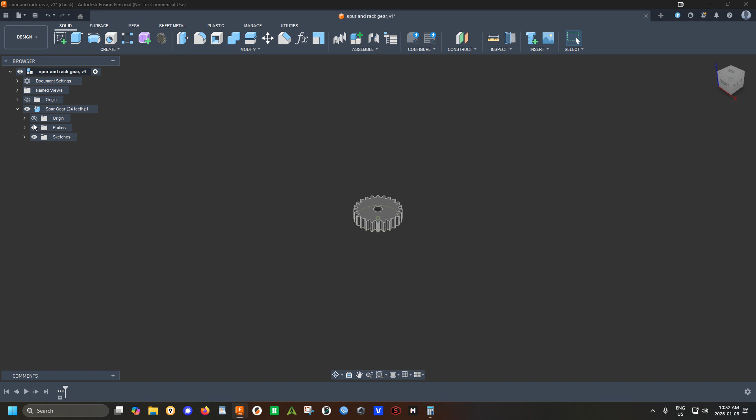Now let's go in here to our gear. Let's go into the sketch. So here's the tooth that it had used. And here's that. Okay, let's go. We don't need that for right now.

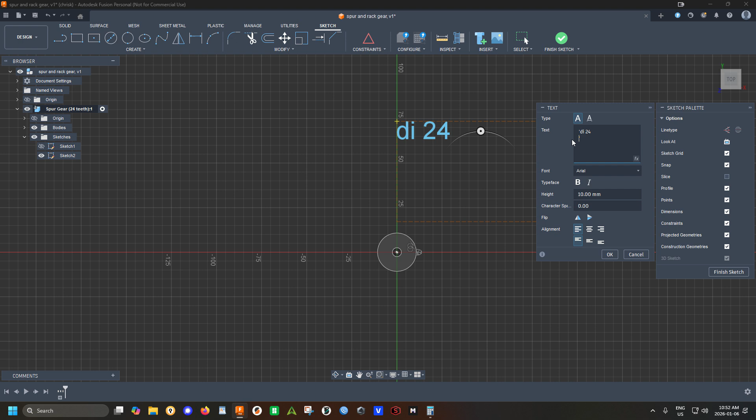Let's say edit. Now just for ease of use, so we have a diameter of 24. We have teeth of 24.

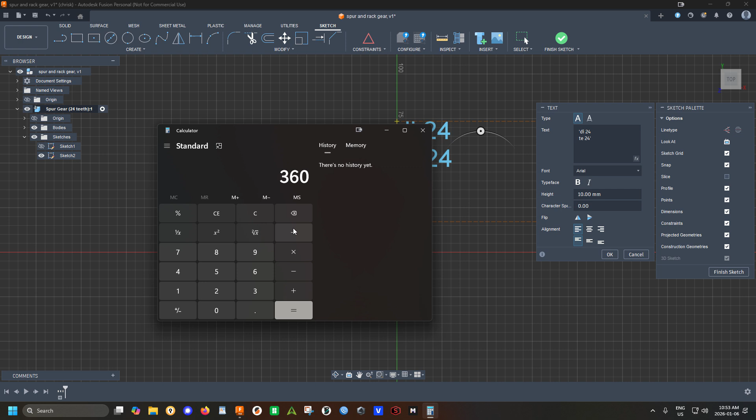And now let's do a full gear is 360 degrees. 360. Now let's divide that by 24. That gives us 15 degrees. Now we need half of 15 degrees. So let's say divided by 2 equals 7.5.

So let's go 15 and 7.5. Okay.

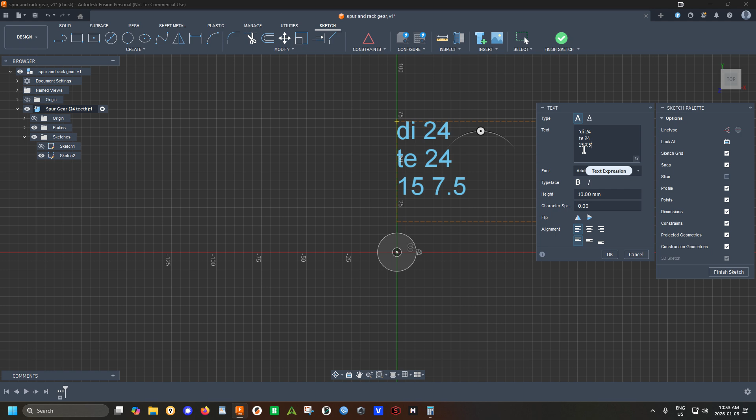Now let's start by we click the center point. Let's click the move thing. Now I'm just going to select all of that. Now I'm going to copy this so I don't mess up what they have there.

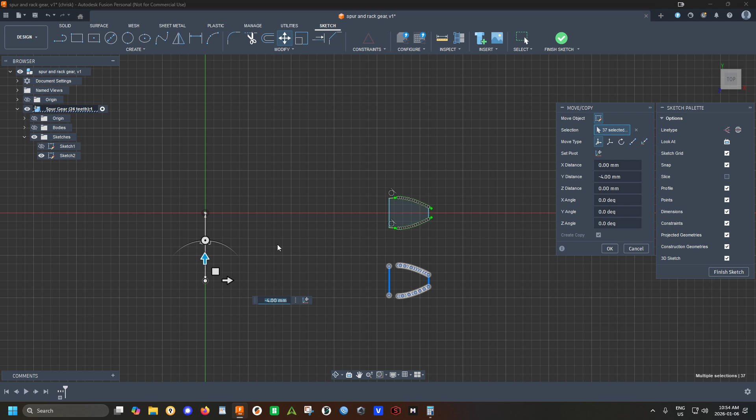Now we're going to go down the diameter. So that is 24. Okay, now let's rotate 90. There we go.

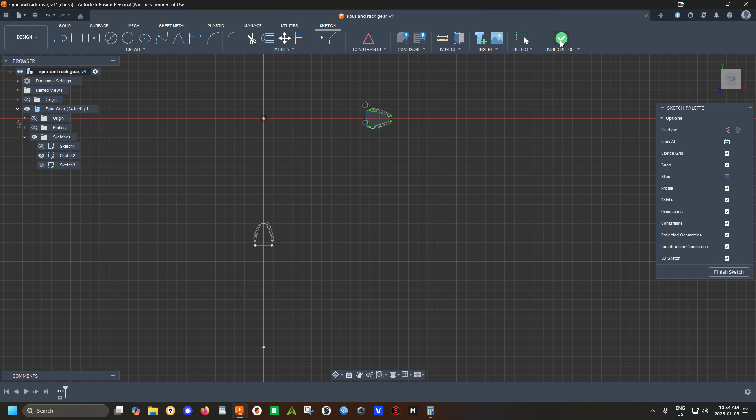Now, this new little tooth should match up with the body. So let's just go in here and now cancel. Need to click our center point, then hit that. Now we can, we don't need to turn the center point.

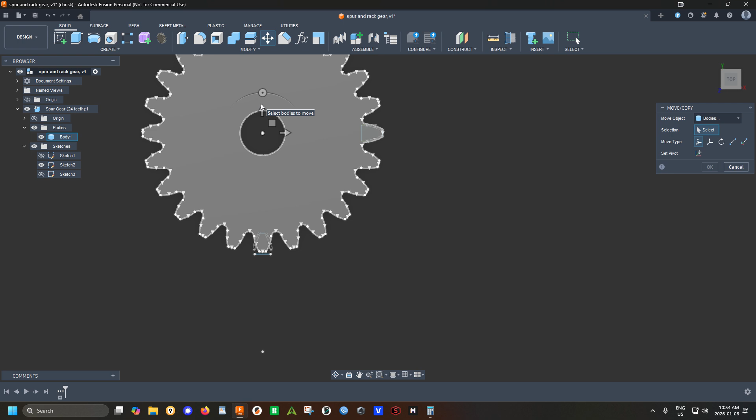Okay, there we go. Now we've selected the gear and the center point. Now let's take this and let's go 7.5. That should then exactly set us in the right spot for our little gear here.

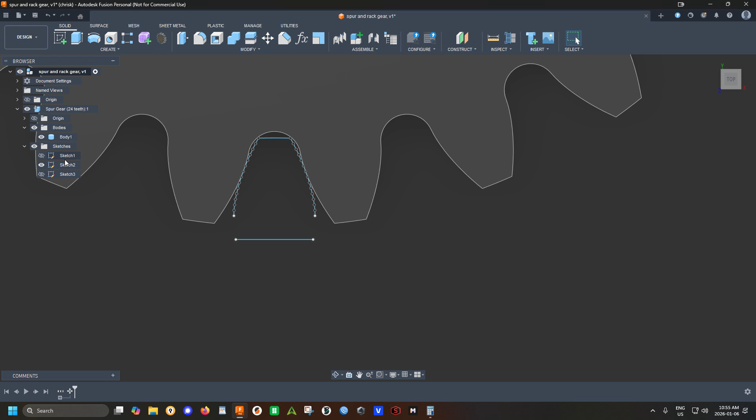Okay, now let's go back into here. Let's use the extend function. Now, if any of these aren't here, they'd be down in here. Sometimes I pin things up along the edges.

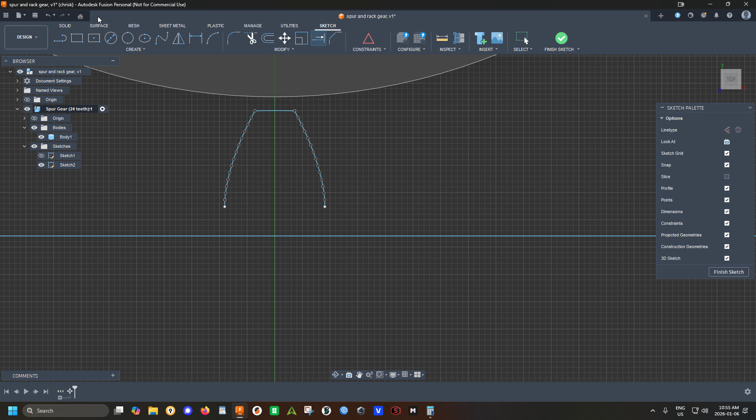Okay, now let's go down with this. Go down like that. Let's go. Cut. Then let's go.

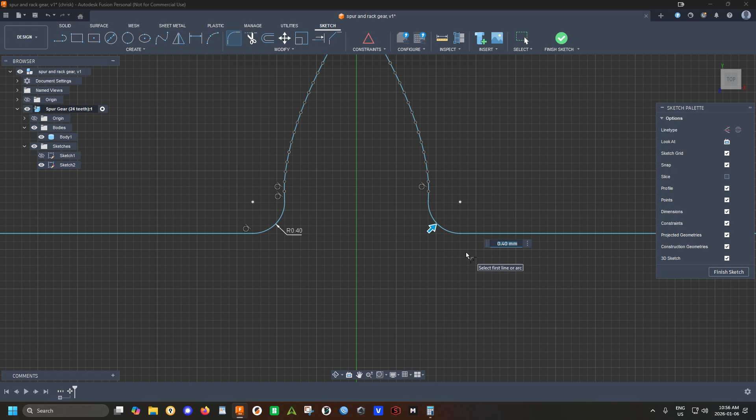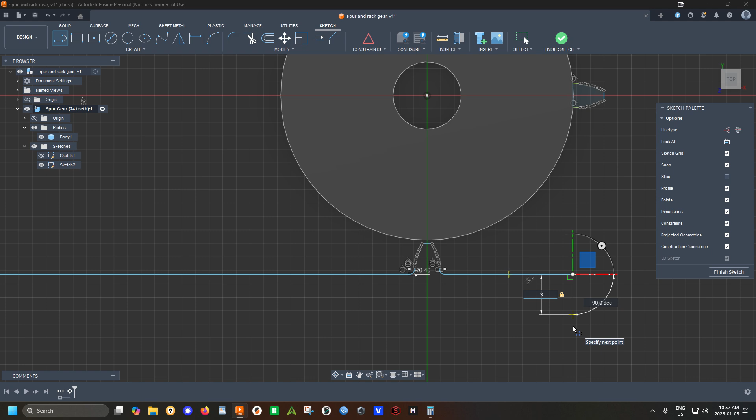40, 40. There we go. Okay. Now we have this. Let's say 3, enter.

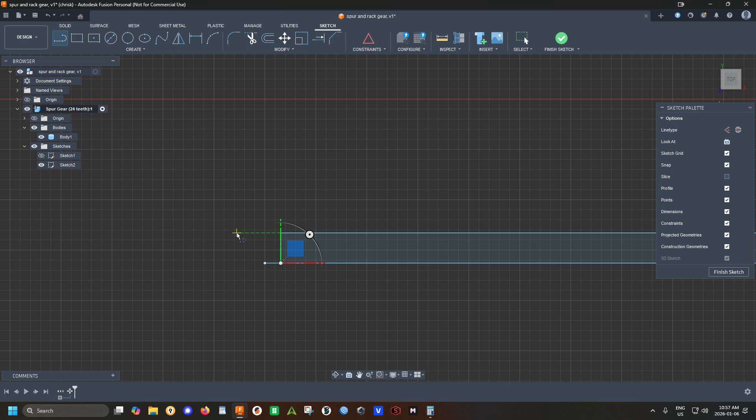Okay. Now let's go here. Now we need to change this to that by spacing.

Now we need, here we go. We need these to be, we want our diameter 24 times pi, times pi. No, we got to be capital.

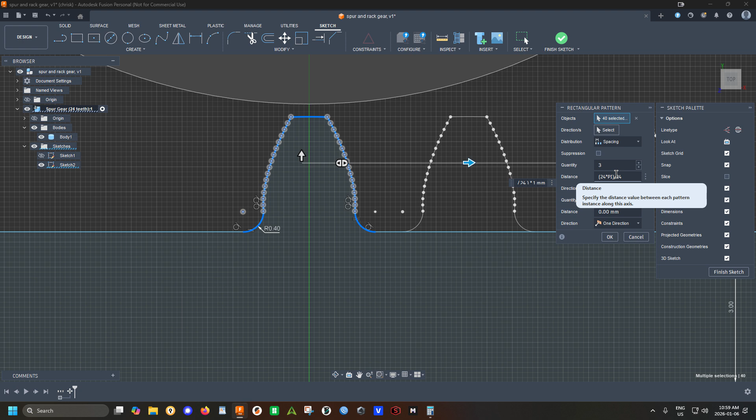Diameter times pi, and now we're going to divide that by our teeth, which also happens to be 24. And I'm going to do that in the negative direction, just because that's the direction I was headed.

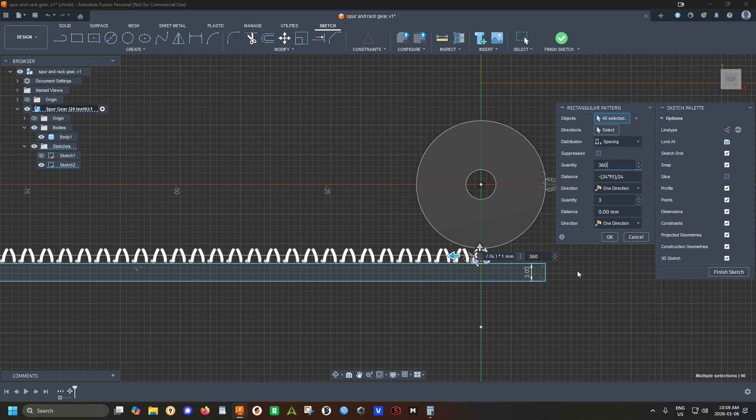Now, let's set the quantity to 60. Oh, no, not 360. There, 60 for now.

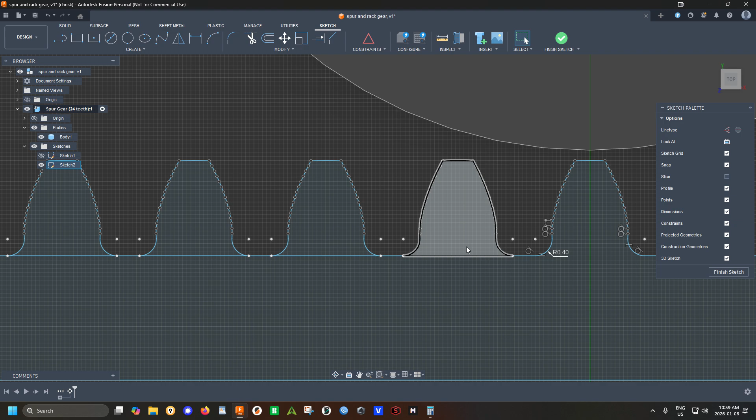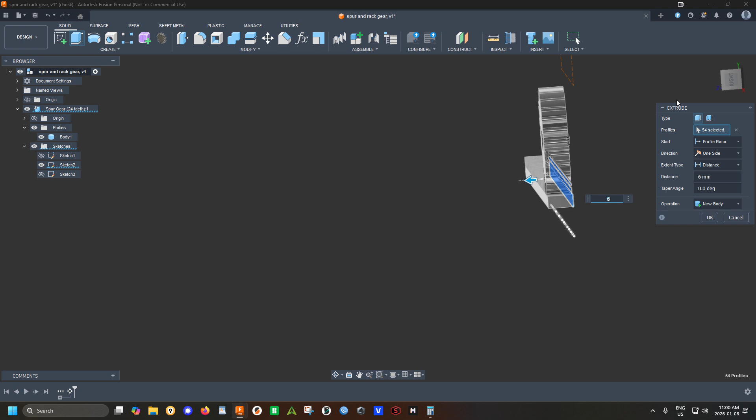Okay. So, and we had said 6 before, so we're going to remember that number. Yep, lines up. Okay.

Now, another thing I really like to do is chamfer all my edges just a little bit. Let's say 0.3. Makes everything look so much nicer. Wait. Okay, there we go.

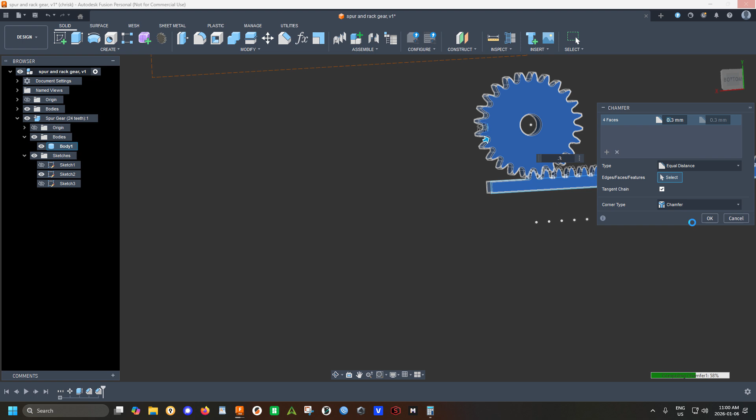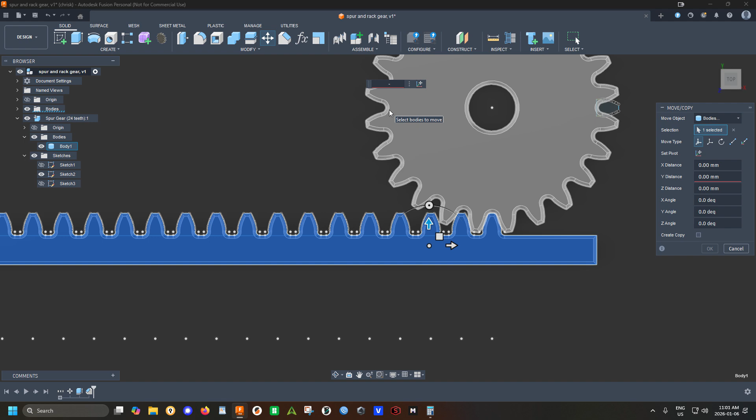There we go. We have a nice rack gear, and if we want to increase our gap or anything, we can just minus 0.2. Now it's a perfect fit.